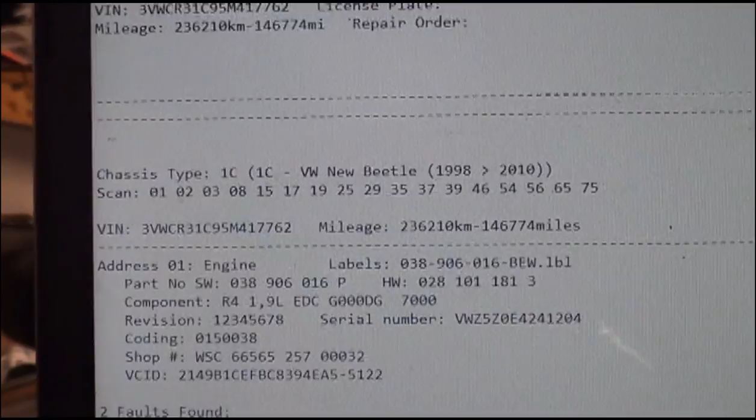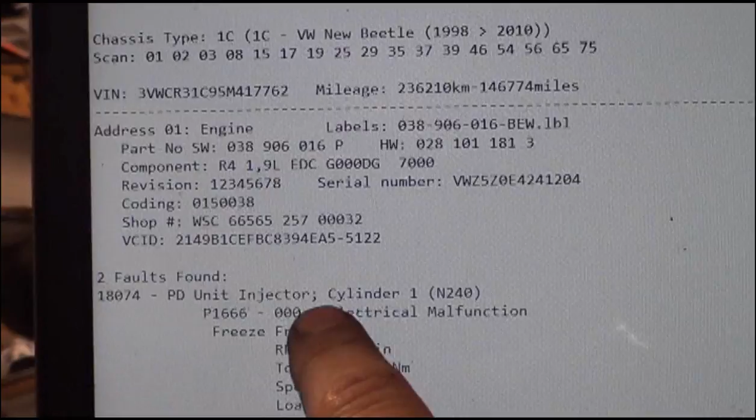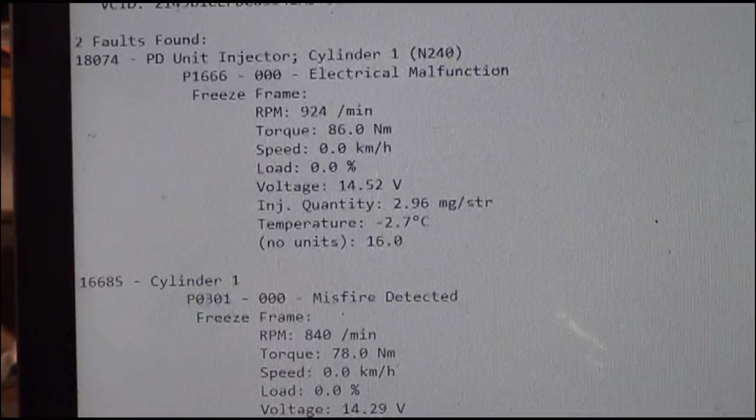Just going to show the auto scan on this one. The trouble code here, 18074, PD unit injector, cylinder number 1, N240, P1666, cylinder number 1, P0301 misfire.

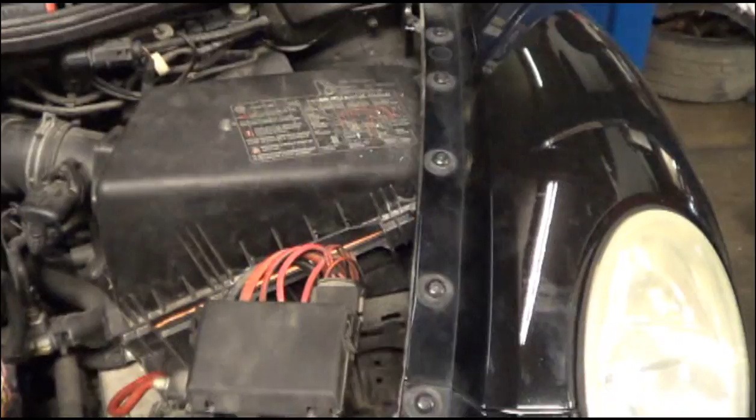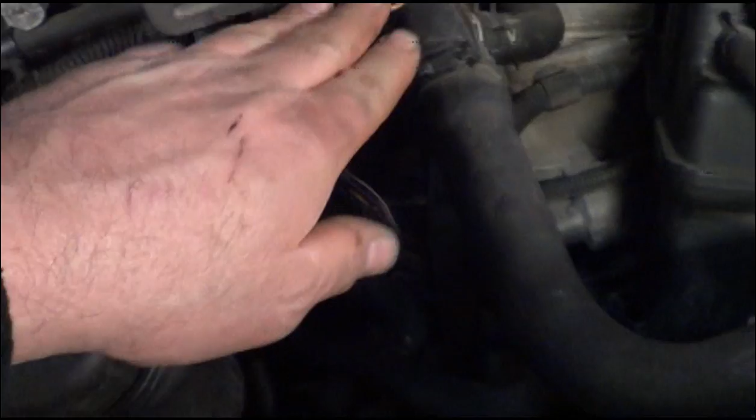I pulled the battery out to inspect the harness, as some PD TDIs get harness damage due to the loom covering. The plastic loom covering has sharp edges on the inside and it'll bite into the wires, the injector wires and the cam and crank wires, glow plug wires maybe, and it usually happens in this area between the cylinder head and over here underneath the battery. So we update those with some cloth tape so that it don't do that, but there was no damage on this one.

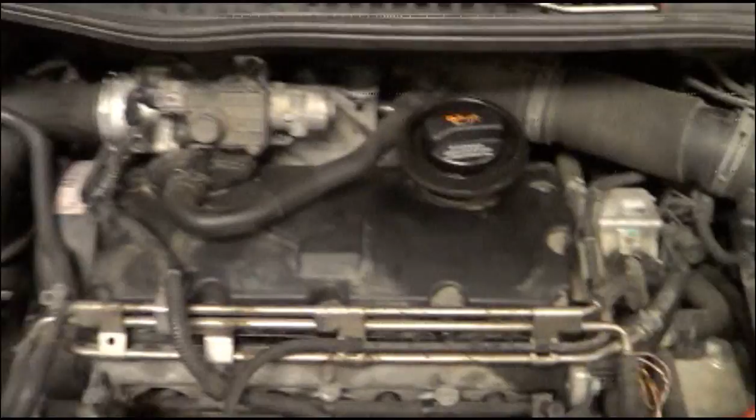So we'll have to get out the scope. I put the boost box in there to run the car, and I assume you can hear that. The engine's shaking pretty good.

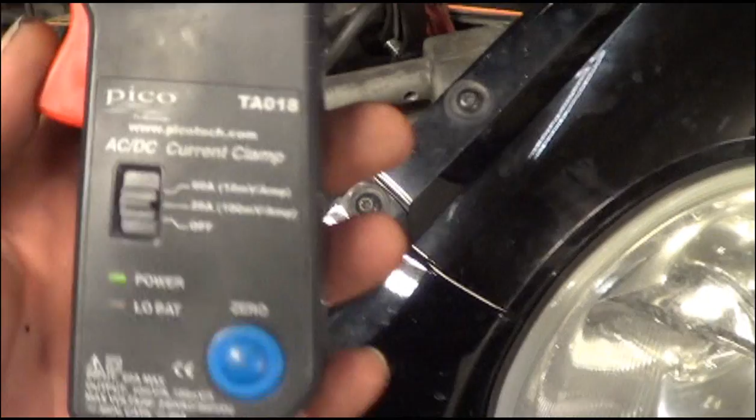Anyway, it's misfiring pretty good. Okay, so we have our inductive amp clamp. It's a 60 amp clamp, but it has a 20 amp scale also. We're going to use it on the 20 amp scale. I'm going to put it on one of the injectors that is working good, so we'll have a known good pattern. And we have a pattern already.

There it is flashing across the screen there. We will select for our probe the 60 amp current clamp on 20 amp mode. -5 to 20 amps should cover it. And then we'll put a trigger on. Repeat.

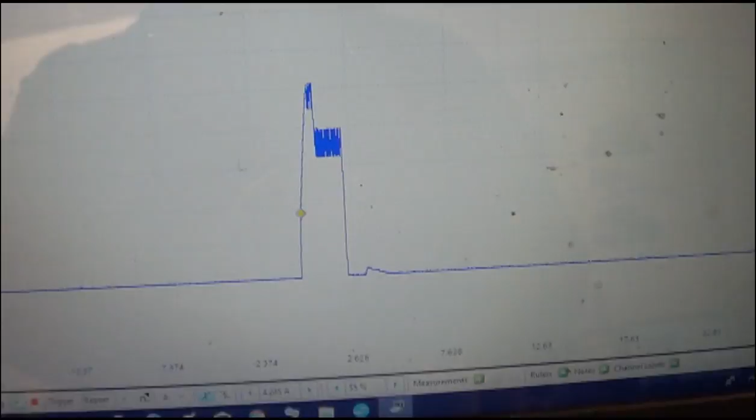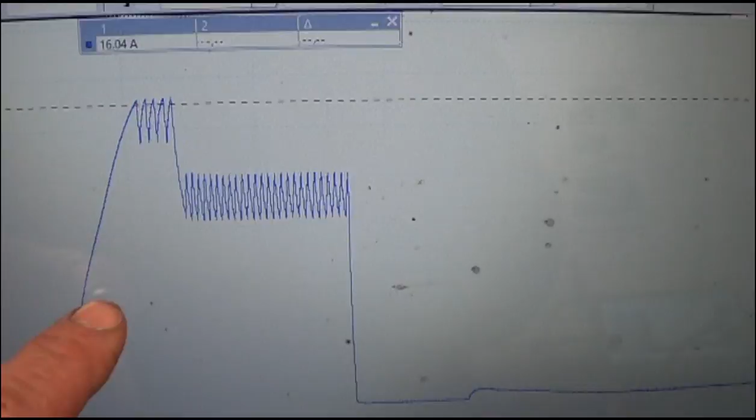And there's our pattern. Change the scaling just a bit. And there's our pattern. Let's drag the cursor down to see how many amps it's drawing. You see there it's about 16, and that's its peak, and then it drops down here and controls it for that amount. It drops back down to ground.

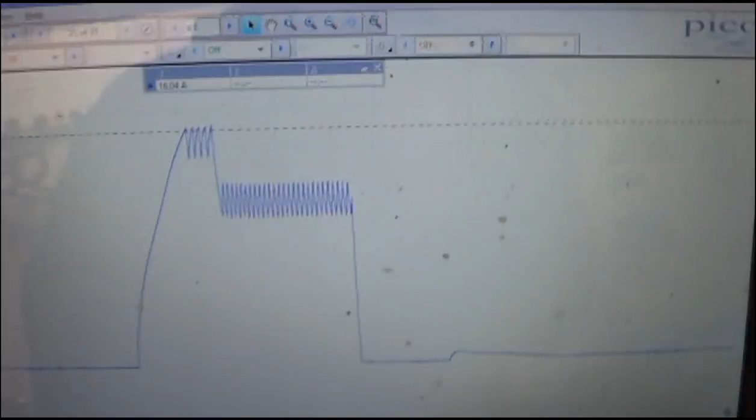We'll move it now to our bad one. See the motor still misfiring like crazy. When the signal stops, this software seems to freeze the pattern on the screen, so that is not our current pattern. Notice it's not moving or fluctuating any. So we have to hit spacebar to get it to run again. And at this point we have nothing.

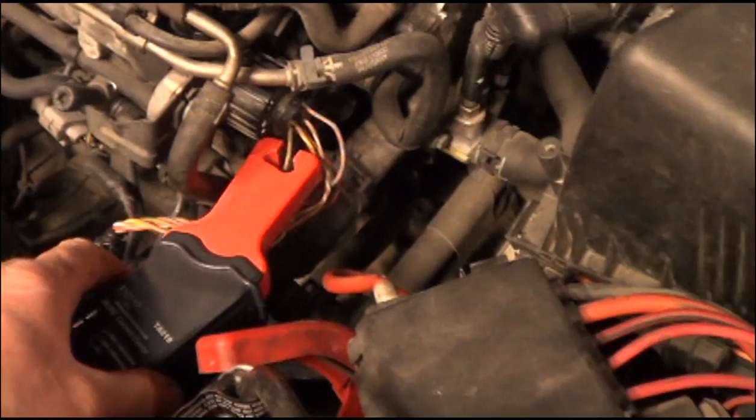This is on our, once again, the number 1, where the problem is. There's nothing. Move it back to our known good, and instantly we have a pattern there. You guys can see it's fluctuating because it's a true pattern. And then we'll move back to the number 1. Hit our spacebar a couple times, and we have nothing. No amperage flowing through. Let's try our other ones.

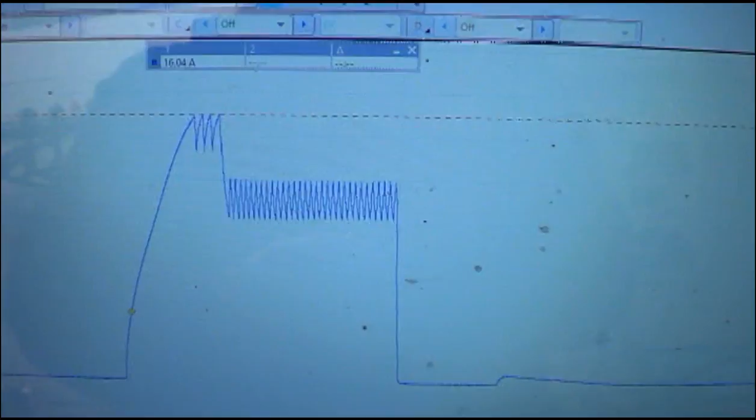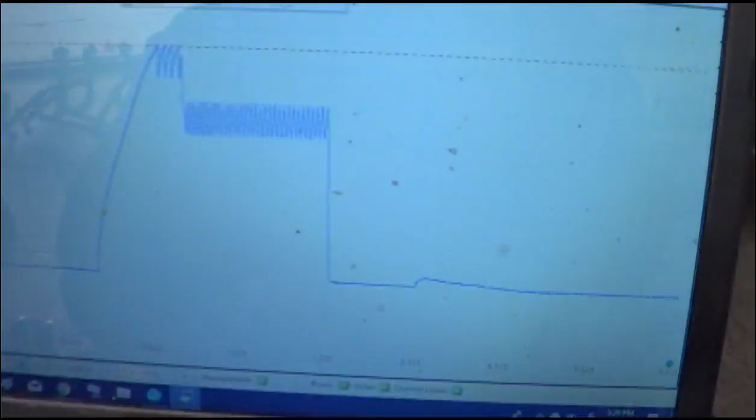This is our one, I don't know which is which, I just know it's a working one. That's a good pattern. That's back into that one there, working. And back to the number 1. And a frozen pattern, so hit the spacebar a couple times. Nothing.

So what's the cause of no amperage through there? Is it the wiring? Is it the injector? Is it the wiring underneath the valve cover?

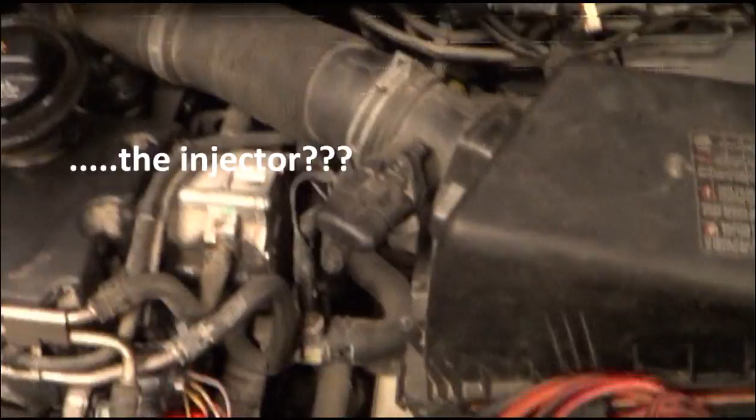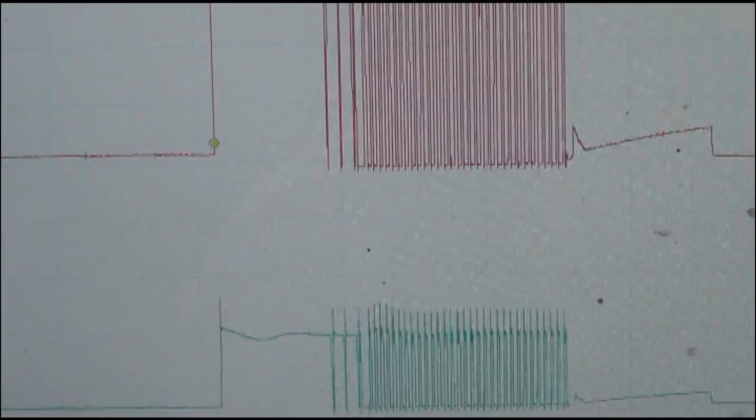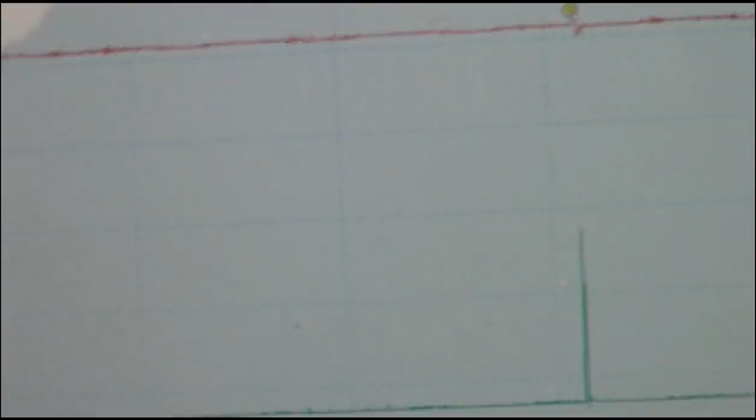Let's do some voltage tests. Okay, I'm trying to take some voltage readings with the scope on our misfiring injector, and I have readings here that I don't understand. That might be logical, but that's the ground side of the injector. I guess it's possible these injectors are controlled on the positive and the ground by the computer.

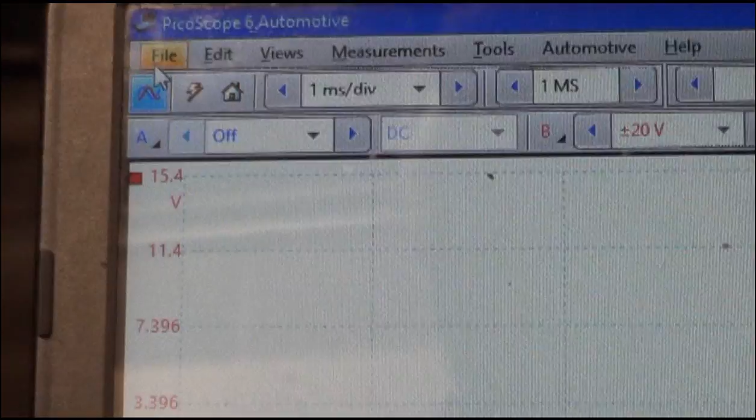One of the cool features of the PicoScope, though, is right here inside the file menu. You can do waveform library browser, and then you can search, and I'm going to put in Volkswagen.

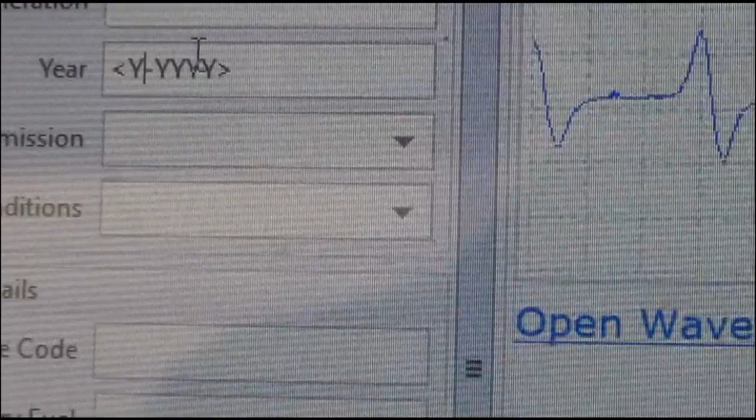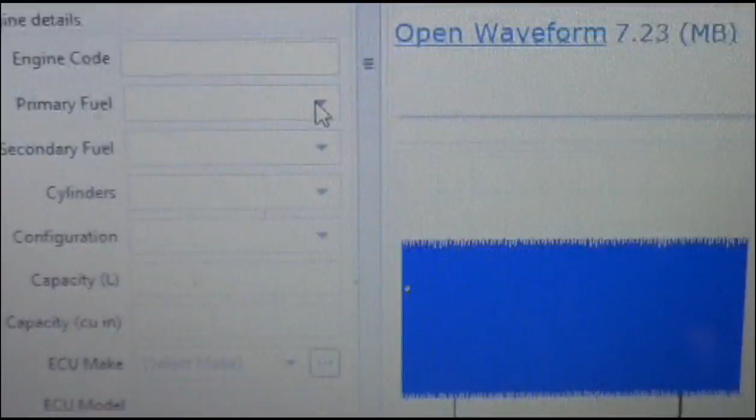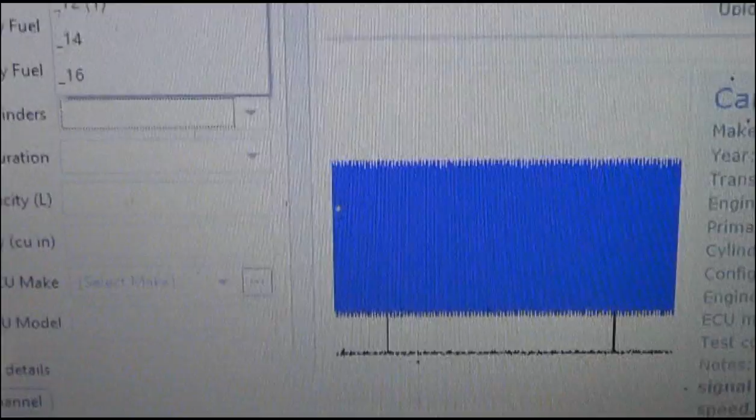I can put in the year range. I know this PD style of motor was used from 2004 to 2006 here in the United States. I could put in diesel, search just for diesel schematic or diesel waveforms. I could put in number of cylinders, search for 4-cylinder waveforms, but I know this engine's a 1.9, and almost exclusively the 1.9 here in the United States was a diesel. I'm just going to put in 1.9.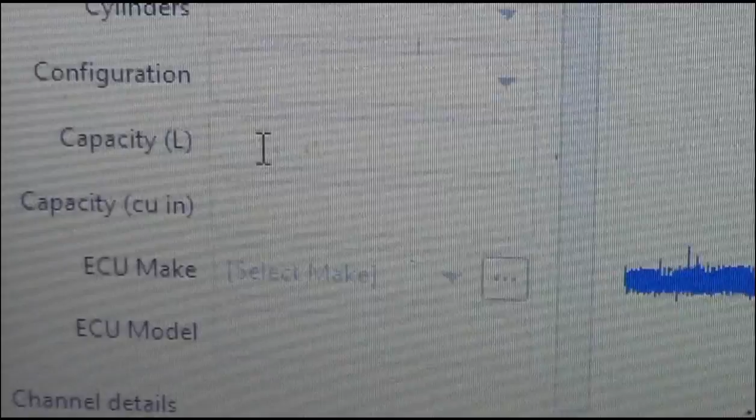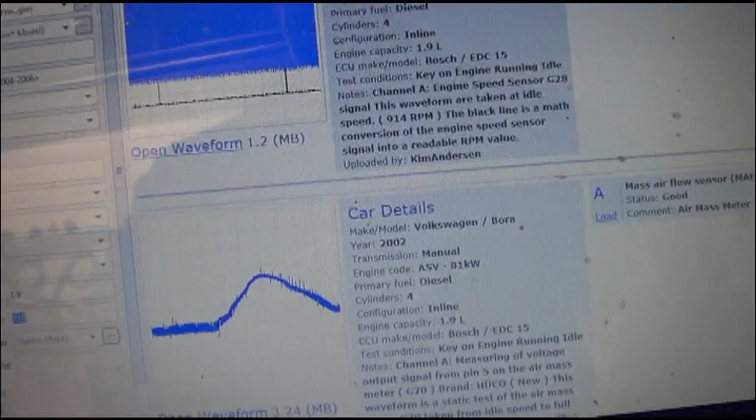I hit enter, it'll search. Then we look for the injector pattern. And there's a nice waveform. Shows the amperage draw and the voltage.

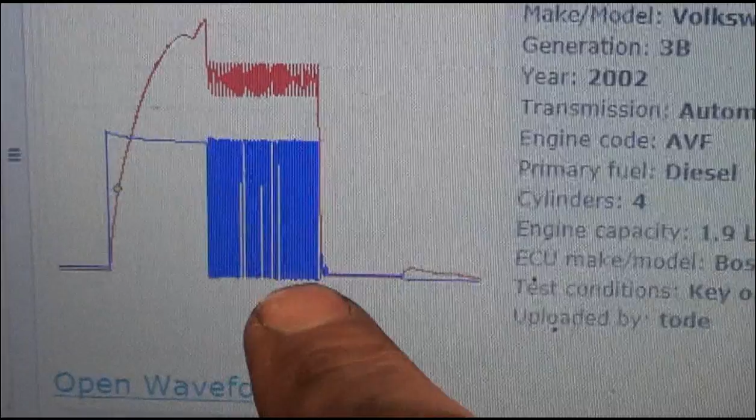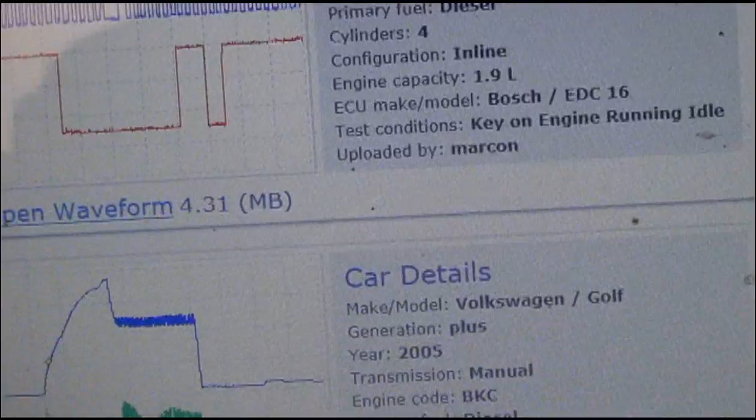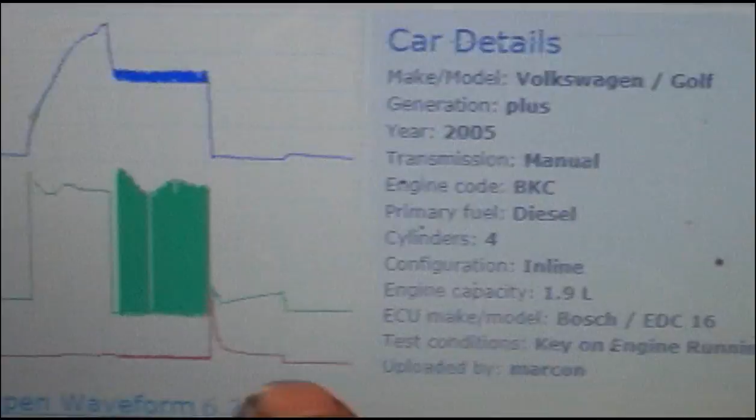Injector voltage, injector current. But I'm kind of understanding those. I want the ground side, see what's up with the ground side. Let's see if there's any more. And there's one that's got the injector amperage, injector voltage, and the ground side. Injector current, injector earth, injector voltage.

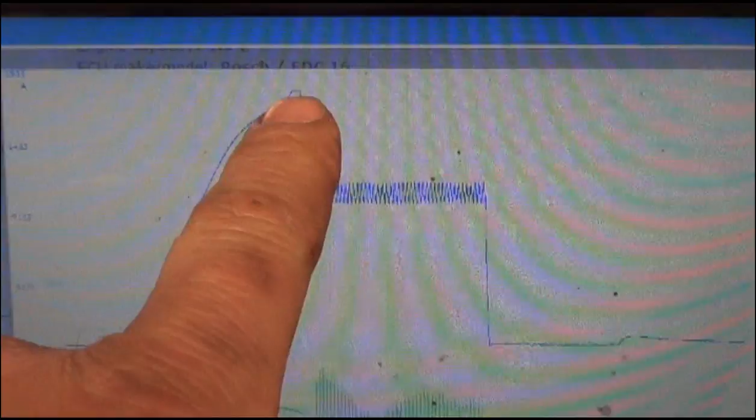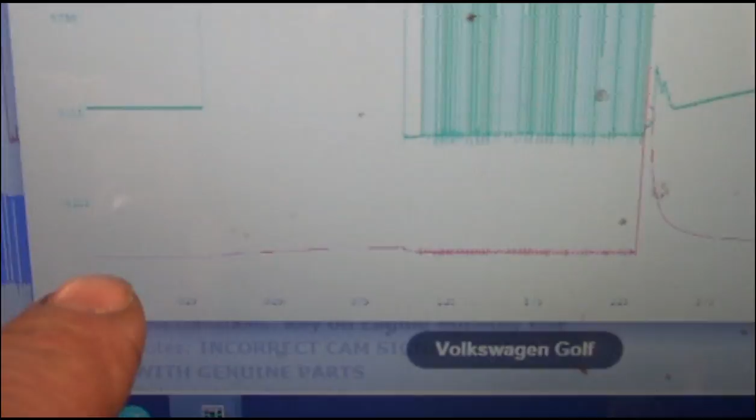But what exactly is going on with that ground side, which is the red trace? Amperage seems pretty clear cut. The computer controls the amperage to a peak, and then it holds to this point, almost like a peak and hold gasoline injector. The positive side seems real clear cut. The computer gives it 12 volts, holds 12 volts there, and then regulates it with a pulsing action. It's down there. The scale is down here.

I'll pull this up on the scope to show you, because this picture isn't very viewable. But luckily, you can just click the open waveform button, and it'll pull up on the scope, make everything much easier to see. But anyway, we know this is a known good, so let's hope ours looks this way.

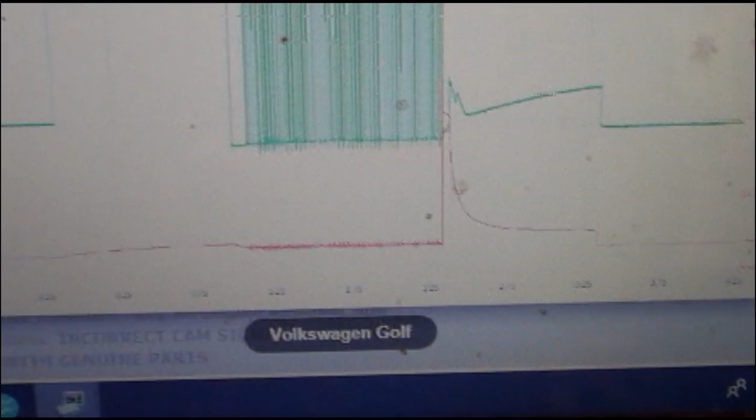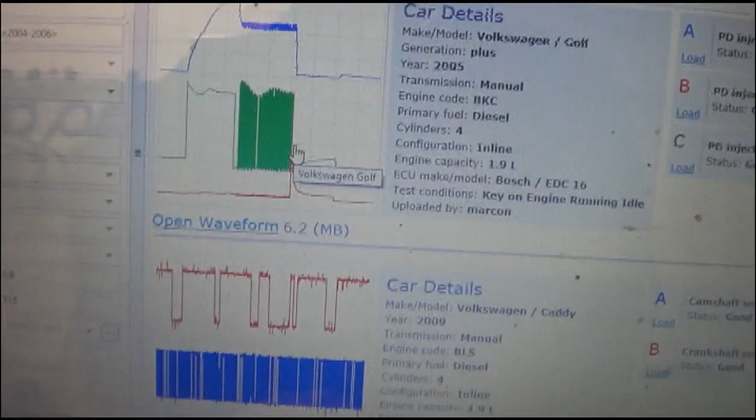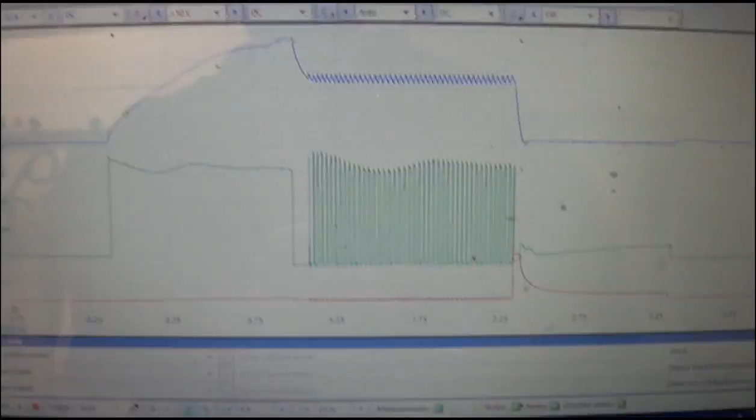Okay, so let's escape out of that, and then we'll click our open waveform button. And that puts that waveform in the scope software, which you can get to by minimizing, which it didn't do. There it goes, it says loading. And much more easy to read on the full-size screen here.

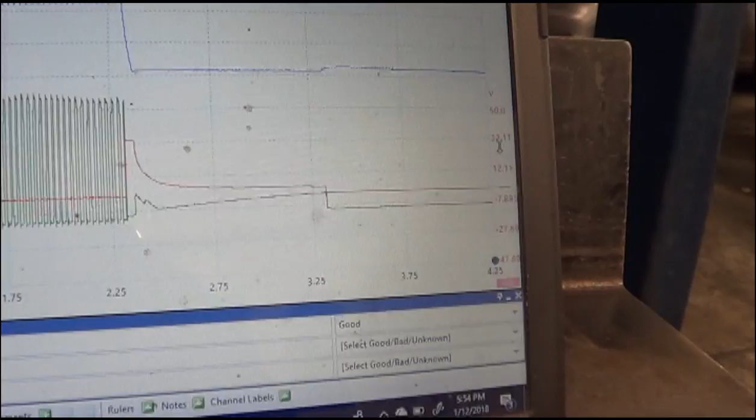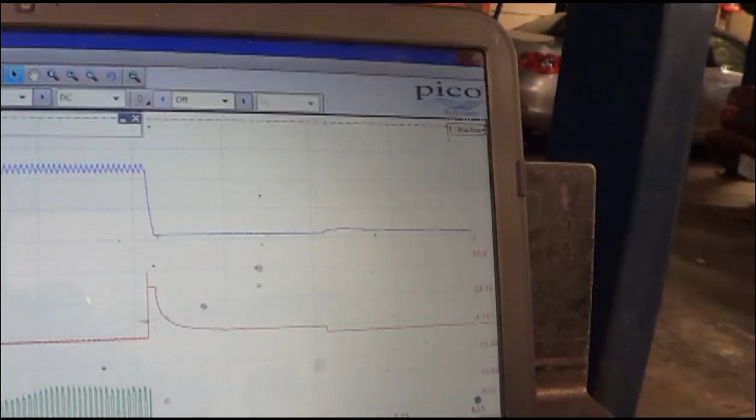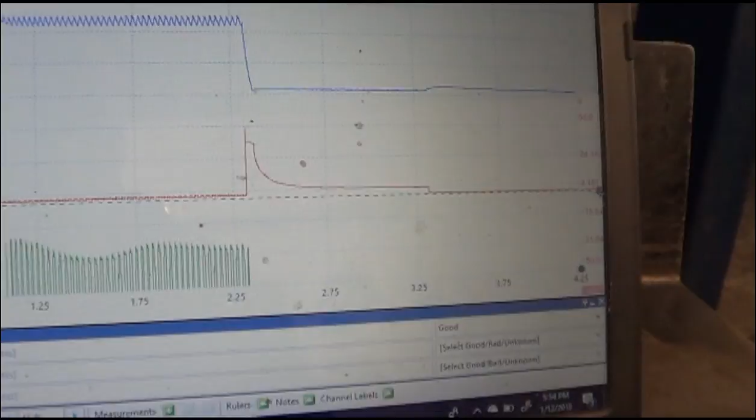So we'll move this red one up, move the green one down out of the way. And let's see what's... Go up to the corner here and move the measuring line down. It says negative 1.66 volts. I'm pretty sure that means... Move it up just a little bit more. Yeah, that's basically 0 volts there. And then...

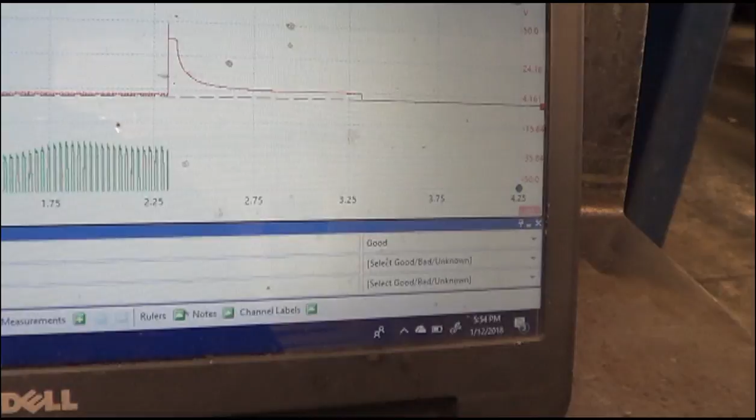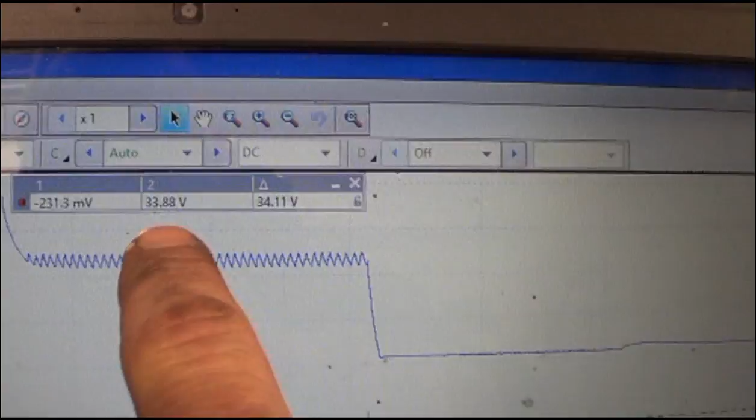See what this voltage spike here is in the middle. And that's 33.88 volts. So is that just an inductive spike? But anyway, that's our known good.

Let's see what we got. So I figure if one injector is drawing no amperage, that if I did like a parade of the injector patterns by putting the amp probe on the common wire that all the injectors are from, which is this yellow and tan and yellow, that I would see 3 patterns, 1, 2, 3, and a missing one, which I have.

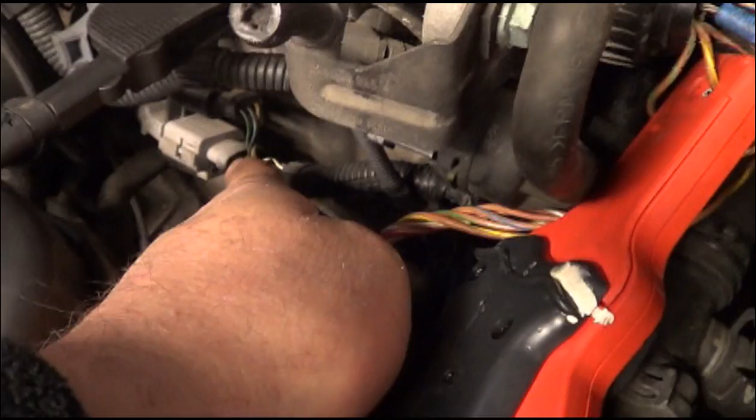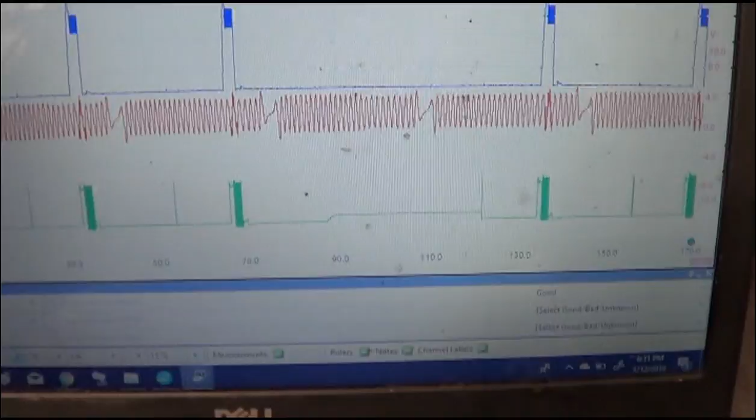And in order to understand it, I decided to back probe the crank sensor. So now I have a crank sensor pattern on here, and every two of those indexes is 1 revolution of the crankshaft. So we obviously have a missing cylinder number 1 here, no amperage draw whatsoever.

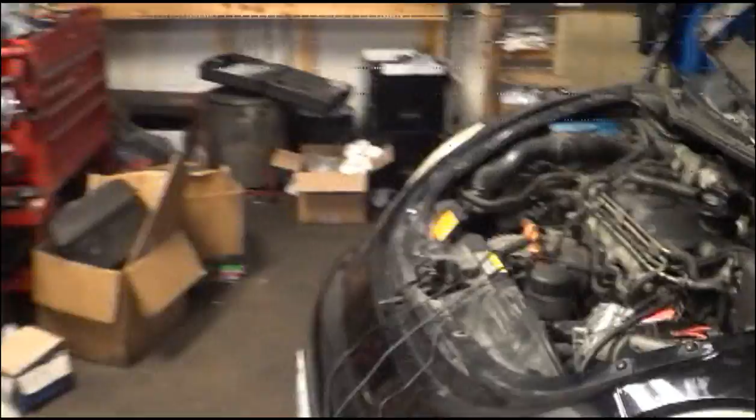Let's clear the code and see what happens. Well, actually, let's just turn it off, turn it back on, and see if it still misfires. Seems really smooth now, no engine jumping around.

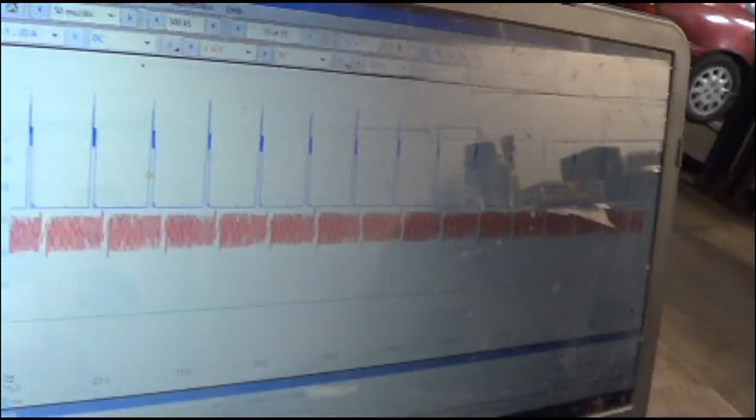And there's our pattern. We've lost our crank signal. Let me wiggle the connection there. And lo and behold, drawing amperage again. So the circuit code triggers and the computer stops putting amperage through that injector.

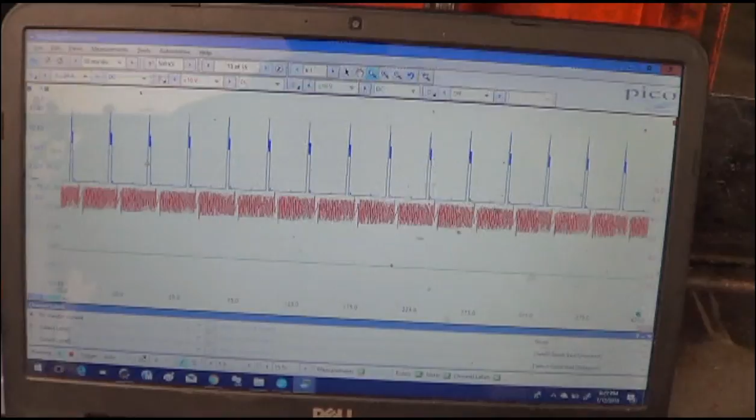It's going to be really hard to catch the actual problem, because what we've been looking at is just the computer's reaction to the problem.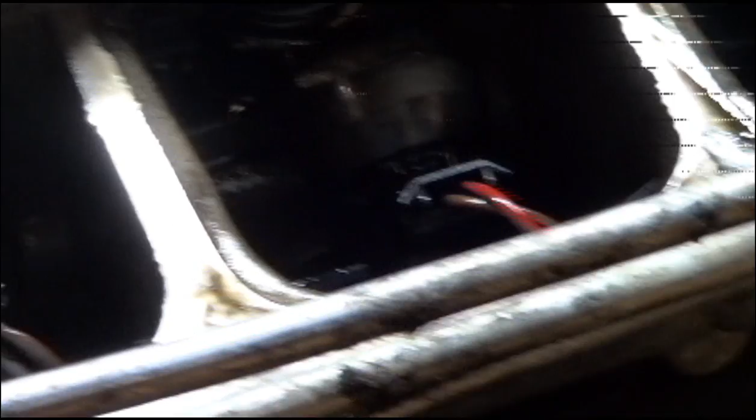Recently we did a video on an injector trouble code and I lost the footage of the fix. So I have another one here with an injector code. This is a BRM, the other one was a BEW, but basically the same layout, same type of injector harness, same type of injectors. This one I'm going to show the fix on since I lost the footage on the other one.

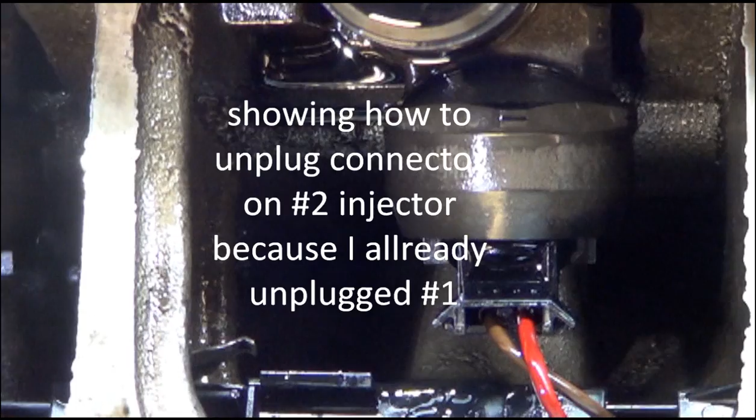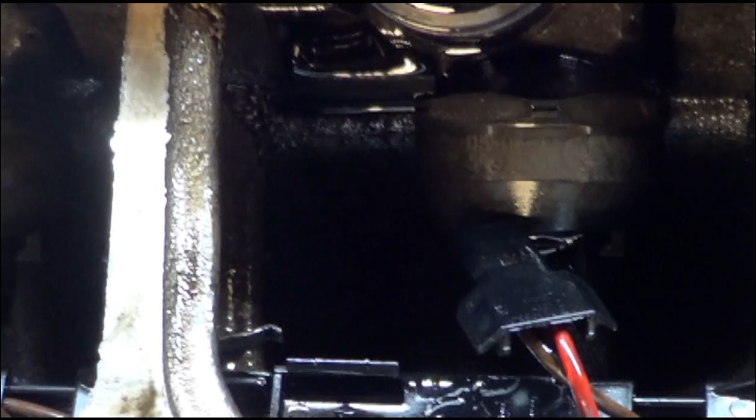You release the plug on the injector by going underneath it with a scribe through a window here, then lifting up, and it unplugs easily. That's the window you're going through, you stick the scribe in there and pry it to unplug it. That's an injector.

Can you back off a little bit? Okay.

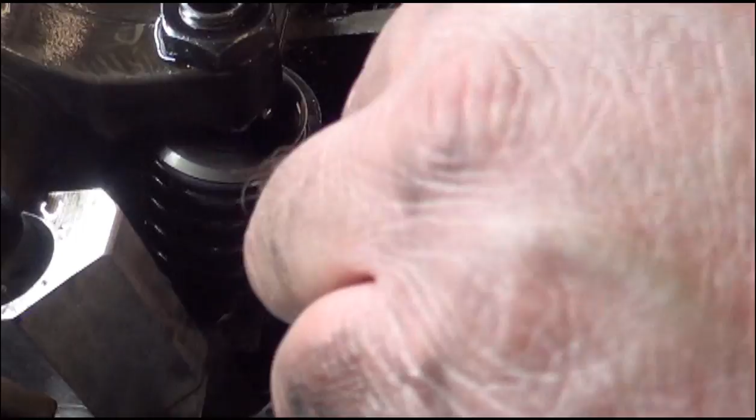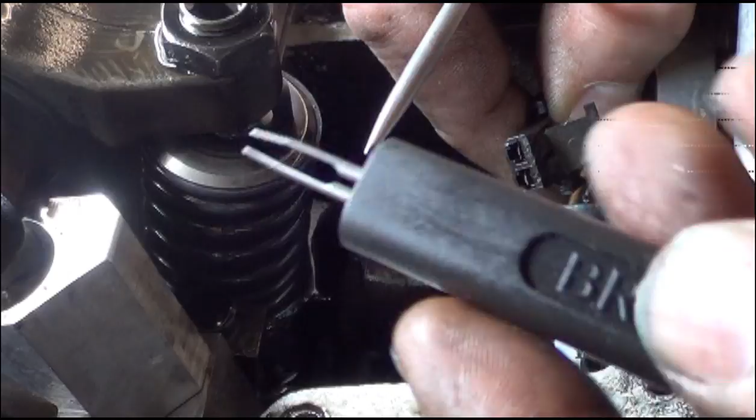To release the pin out of this connector, you work this up by prying in here. Those two pieces right on the tip there are the lock tabs. After you get that up, it does have lock tabs on that plastic door, so it won't come out unless you fold that up. But then you also need to go inside here with an electrical pin removal tool and push that down in there, and that should release the pin.

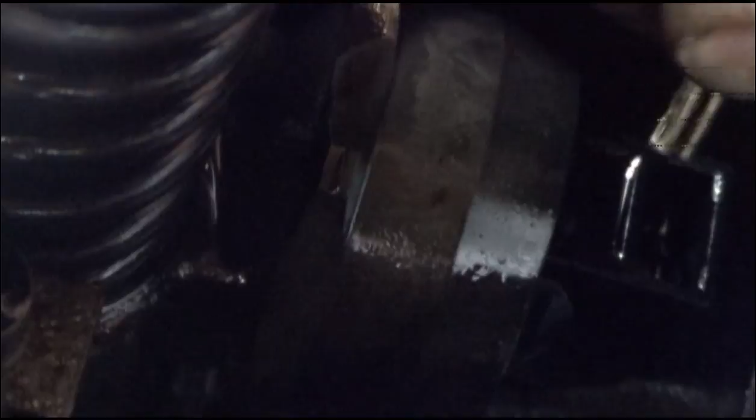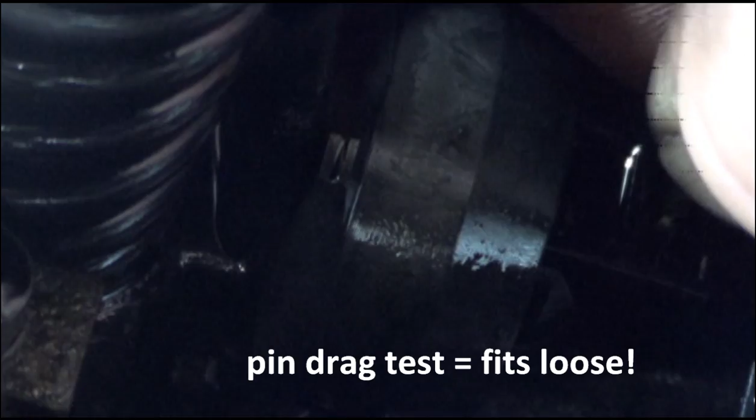Okay, it took me a while, but I was able to get it out. Make sure you put the wires back on the correct side of the connector. But if you look inside there, that is opened up and loose fitting. You can try it on the pin of the injector, and that fits really loose on there. So give it a little squeeze.

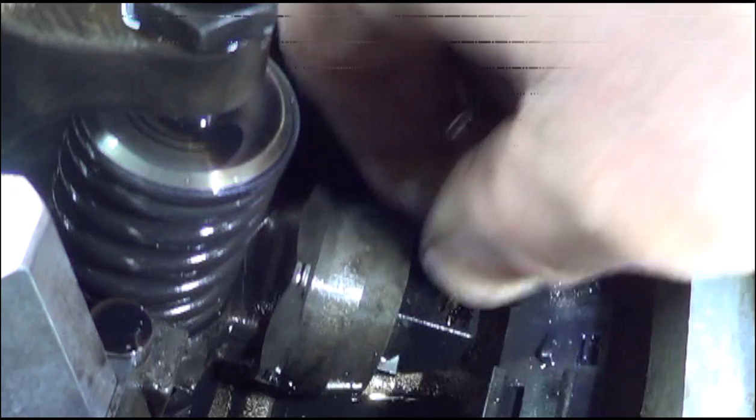Okay, it took some work to reshape that, but I got it back into shape. Yeah, I just need to reinsert it in the connector in the right position.

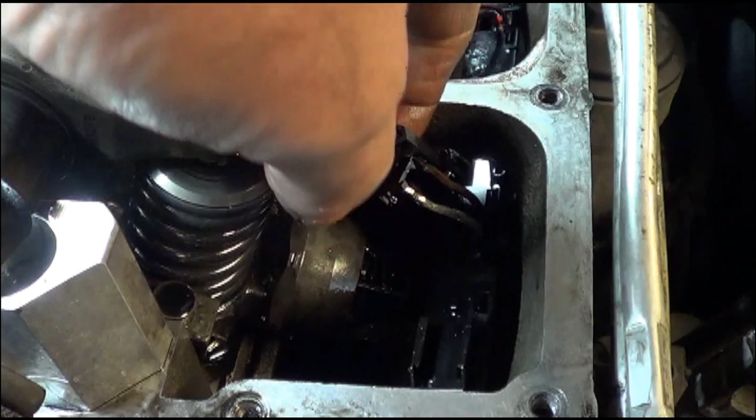Well, there we go, back together. Plugged in and good to go.

Man, am I tired. It's about 8:30 here. Stayed late to finish up a timing belt for a customer.

I wanted to discuss the diagnosis on the Beetle with the injector trouble code, TDI 2004, and I lost the footage of me continuing to work on the car and fixing it. Luckily a second vehicle came in that I could show the fix on, but we did have some footage of me messing with the scope, looking at this, looking at that, basically just scratching my head and looking confused. The footage wouldn't have helped us anyway, but how I ended up actually diagnosing the problem was just through experience.

I actually had an injector code years ago, more than two years ago, and it was a pin drag problem. So that was always in the back of my mind as I was trying to diagnose this one. But I don't remember how I diagnosed the first one. Maybe there was an internet post or a forum post, and someone else had mentioned pin drag.